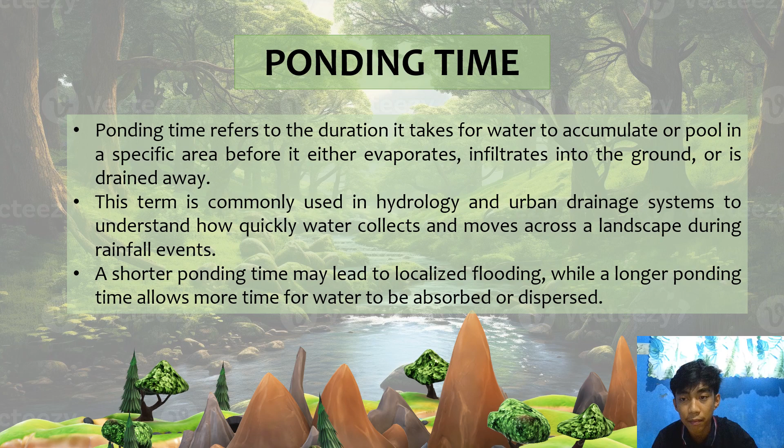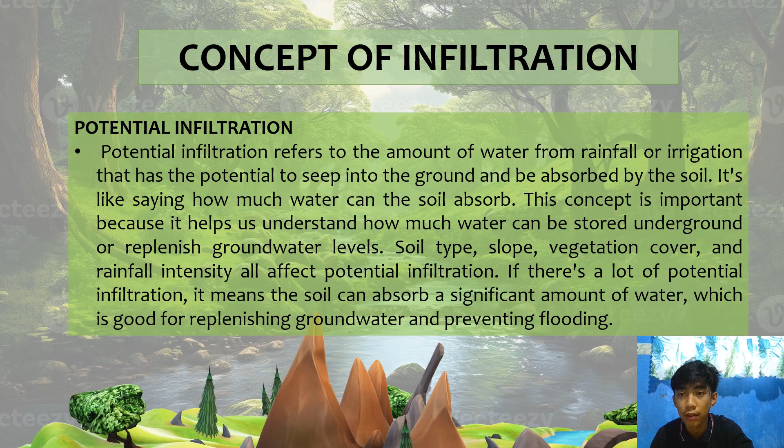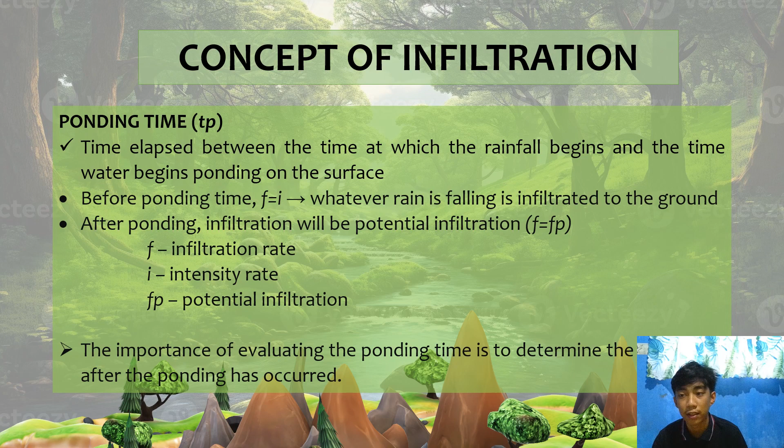So, we can see here that the importance of evaluating the ponding time is to determine the infiltration after the ponding has occurred. So, next.

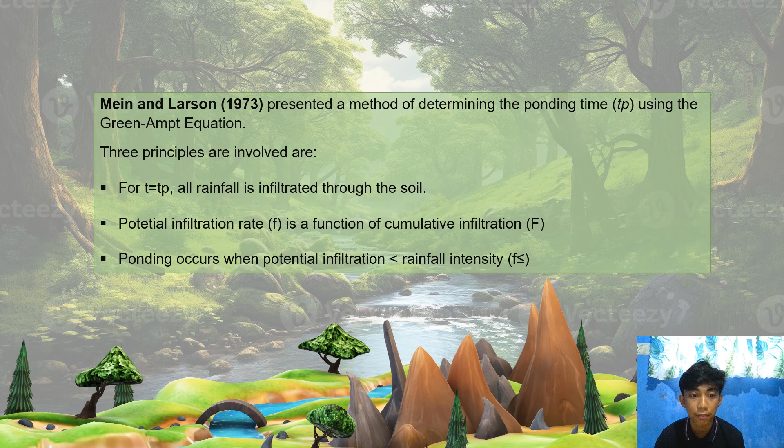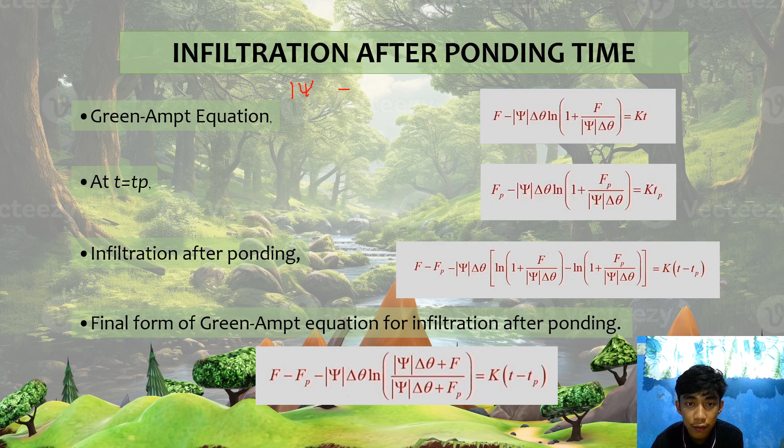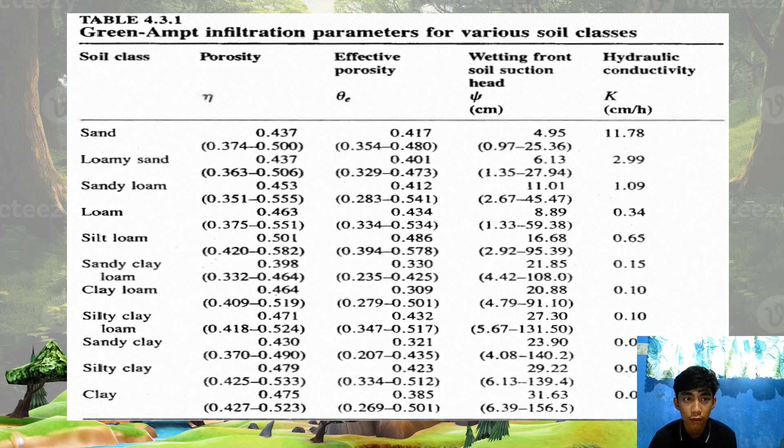So, ganito. So, ito po, may table din tayo para mas madalian na lang natin hanapin ang mga value ng K natin, ng psi, ng effective porosity, tsaka ng porosity natin. So, dito po tayo sa sample natin. Sample problem. Para magamit naman natin itong formula na to. Calculate the cumulative infiltration and infiltration rate after 1 hour and 30 minutes of rainfall of intensity 5 cm per hour on a silt loam soil with an initial effective saturation of 30%.